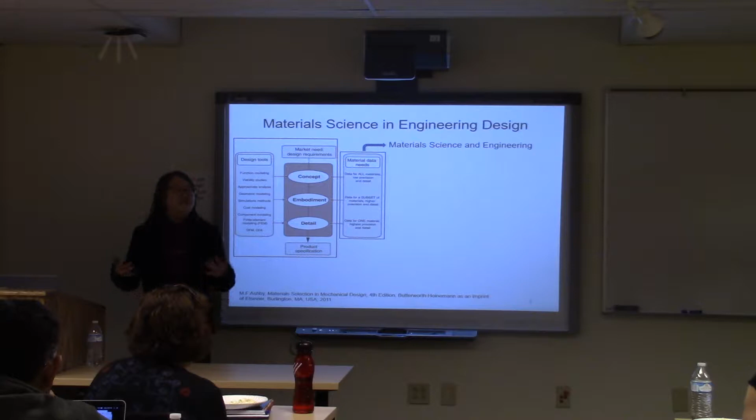So which actually puts the material science engineering integrated to the design process. Because you need to understand the whole world of the materials before you can choose the right materials for your product and the right appropriate process to make your product here. And to me, the core of material science engineering is this triangle map here, where we investigate the processing, structure, and property correlationship here.

And when I'm talking about structure, I'm talking about multiple scales. It's not just like from very micro scale, we're looking at grains, even from the atomic scale, arrangement of the atoms, point defects. I also see this as a structure. And all this will affect your properties.

So have the data, you understand this database doing this. Eventually, I hope we can do a reverse design. So you know what the desired property you need. And then, based on the knowledge you learned from material science, you know what's the target structure. And then go back to the processing you need to choose to make this product. And nowadays, it's also very important to integrate computational material engineering here to help you understand what's happening during the processing. Instead of doing tons of experiments, you can simulate first.

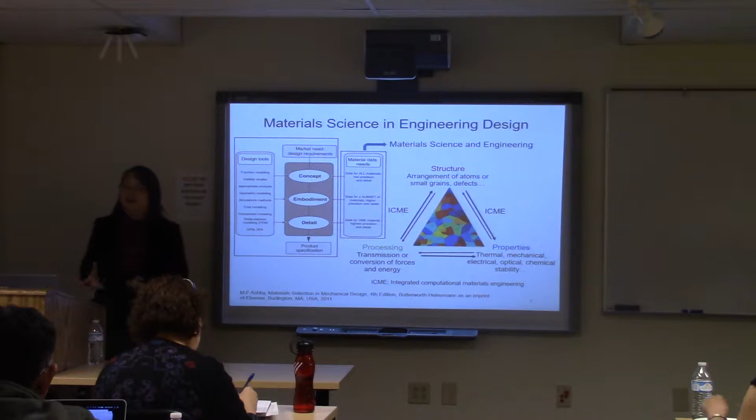And here's what I'm going to cover today. It will be a very broad topic, including my previous research and some representative computational work I have been doing, and the current research I have been involved in, and future research. And then in the end, I'm also talking about my teaching experience and interest.

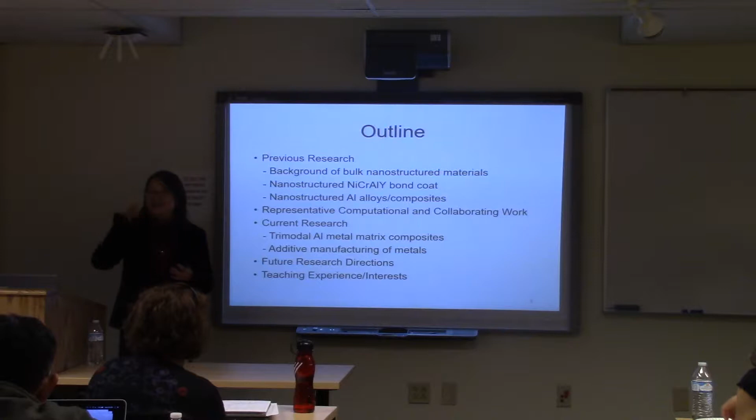So don't be surprised if I skip some slides there because the time doesn't allow me to go very in depth for each result. But I want you to get a sense about what I have been doing to investigate that triangle correlationship here.

So first, since the 1990s, the idea of nanostructuring has been growing in the world of science and technology. And some people talk about nano when they talk about nanoparticles. But what my research has been focused on is bulk nanostructured materials. So from the outside, you still see a solid part.

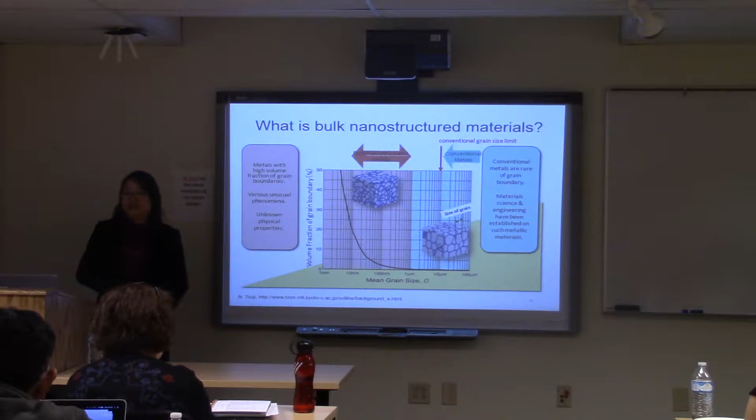But if you look into the internal microstructures, especially for metals, the traditional materials give you kind of a limit of the grain size, about 10 microns. But now people are trying to modify the internal structures to bring in higher volume fraction of the grain boundaries. And those grain boundaries can give you some unique physical properties which cannot be achieved in traditional materials. So I just take the mechanical property as an example here. This is the very early work, foundation about the nanostructure of pure copper.

True stress and strain curves. The lower part curve is for traditional material which have a grain size in terms of 50 microns. But once you reduce the grain size into 25 nanometers, now you have a dramatic increase in the strength here. So you see the benefits we can get when doing nanostructuring.

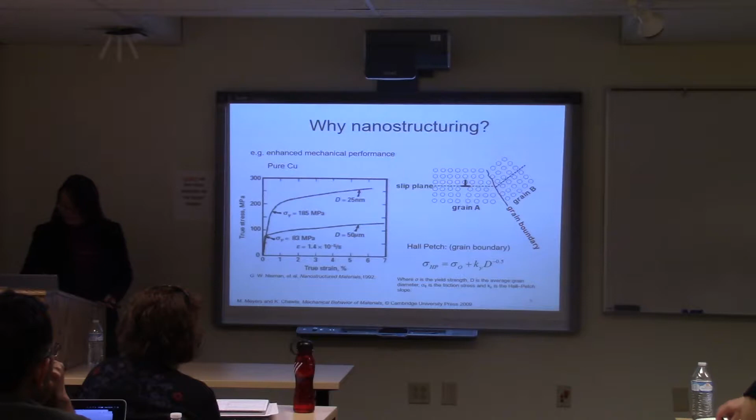There has been a well established mechanism here, where the grain boundaries can help to stop the motion of the dislocations, so you need to apply higher stress to really deform the materials. And it's governed by a Hall-Petch relationship here, where the strength is reversely proportional to the grain size. But in reality, most engineered materials are not pure metals.

They are more complex. They can contain multiple components. So what I have been thinking is how can we extend or use the benefits we got in nanostructure and apply them to real engineering materials. So I selected two very complex alloys from my previous research as an example to give you an idea

how nanostructuring can change their microstructure and their properties. So first we already talked about the question of what and why. Now we need to figure out how we can make those bulk nanostructured materials, right? There are a very wide range of processing techniques to create nanostructure.

One technique is called severe plastic deformation. You can directly deform the bulk material, or you can start with powder, using powder metallurgy. So the technique I have been using is called cryogenic ball milling.

This schematic is showing one apparatus. This is a real apparatus, and here telling you during the milling, the powder will be milled inside a slurry made of milling balls and liquid cryogenic media, for example liquid nitrogen. And then the impeller will be rotating at a very high speed, so we take advantage of the collision between the balls, the impact, to deform the particles.

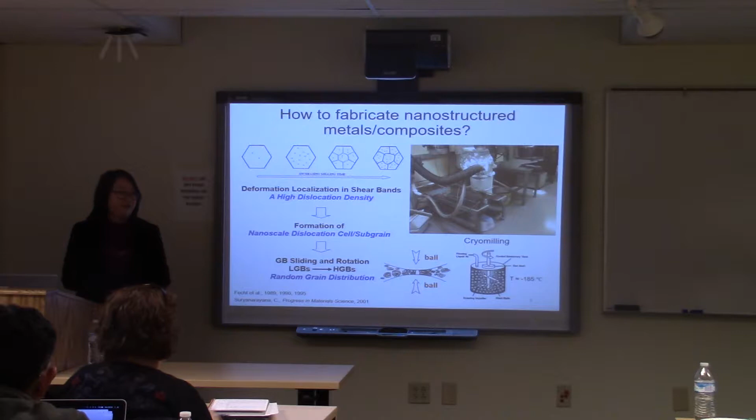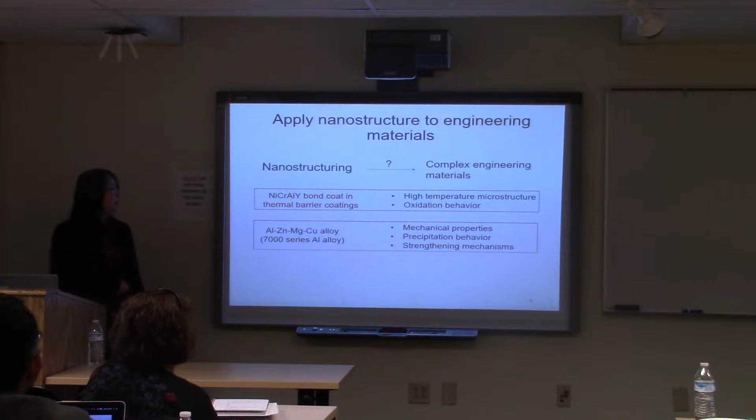So these two unique features of cryomilling give an idea that we can apply this method to complex engineering materials also, because we can start with the powder. So now I'm going to move into detail about the NiCrAlY bond coat in thermal barrier coatings.

Thermal barrier coatings are very commonly used to protect gas turbine blades from a very harsh environment, with very long thermal exposure at high temperature, usually about 1000 degrees C.

So people apply these multi-layer thermal barrier coatings, which include a ceramic layer here, which provides thermal insulation, and a metallic bond coat in between to provide adherence between the substrate and the top coat, and reduce the thermal expansion mismatch.

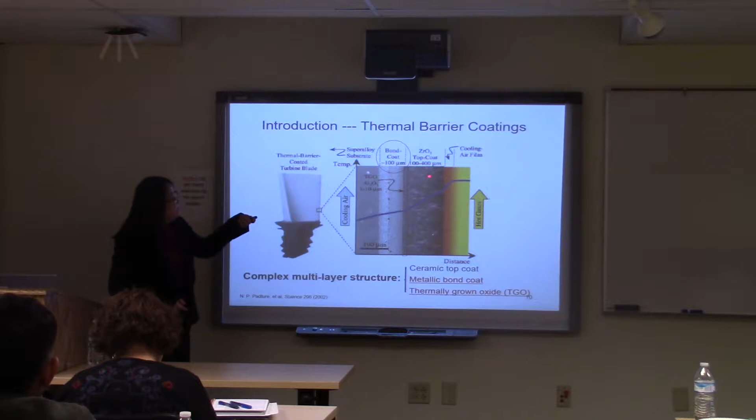And in between here, we also find an oxide layer forming between the top coat and the bond coat. So it's very important to be aware that this oxide is not like a layer we put in on purpose at the beginning. It's a reaction product during the operation of the thermal barrier coatings, due to the diffusion of aluminum to this interface and then the oxygen penetration to this.

Ideally, we hope this oxide layer will be pure alumina, since alumina is a self-oxidation terminating material. Once you have a thin, homogeneous layer, it can prevent further oxidation into the substrate. We also wanted to grow it homogeneously to reduce the stress created during formation of this oxide layer. This oxidation behavior is controlled by the bond coat.

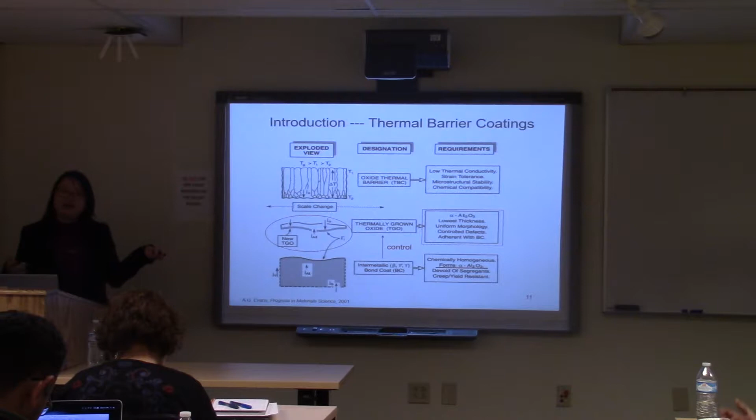Because your aluminum comes from the bond coat, I'm interested to see what nanostructuring of this metallic bond coat can change about the oxidation behavior.

That was back in 2006, when I came to the US to pursue my PhD. So that became the focus of my PhD: to figure out what's the mechanism underneath here.

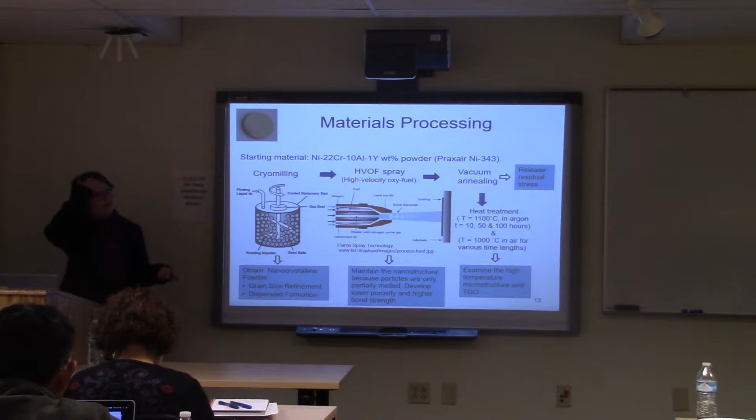So I first needed to make a lot of materials using cryogenic ball milling, and then we use a technique called high velocity oxy-fuel spray to deposit those powders into coatings. Then we apply some post heat treatment to reduce the residual stress. This is an example of the coupons, including both the substrate and the coating on top.

To investigate the mechanism, I also made a lot of conventional materials using the identical processing without the cryomilling, using gas-atomized coarse grain powders as the feedstock.

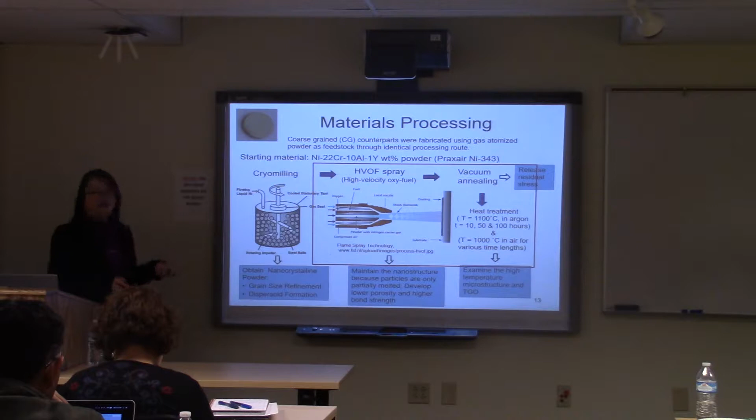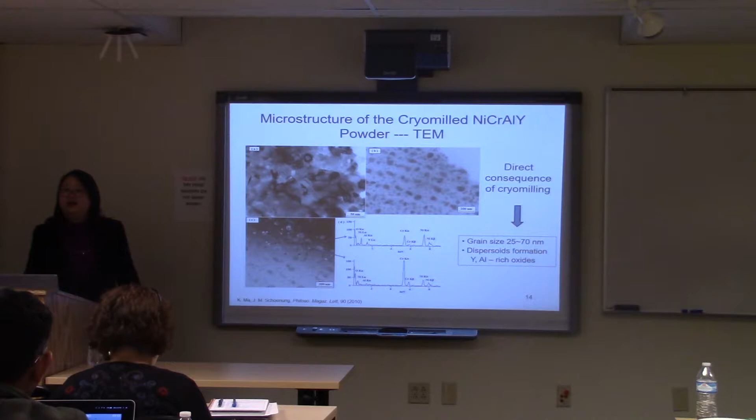First I looked at the powder we got, to see what grain size we got after cryomilling. This is a transmission electron microscopy graph of the powder, and we see the grain size is around 25 to 70 nanometers. We also used energy dispersive spectroscopy to identify the chemistry of some particles and found aluminum and yttrium-rich oxides and nitrides inside. This is very consistent with what we've found in other alloys made with cryomilling.

Using this nanostructured powder, we now want to see what the microstructure looks like when we spray them to make the bond coat. On the left is the conventional material made from gas-atomized powder, which has a coarser grain size of 2 microns or above. On the right is the cryomilled one, using nanostructured powder as the feedstock. You can already notice the distinction.

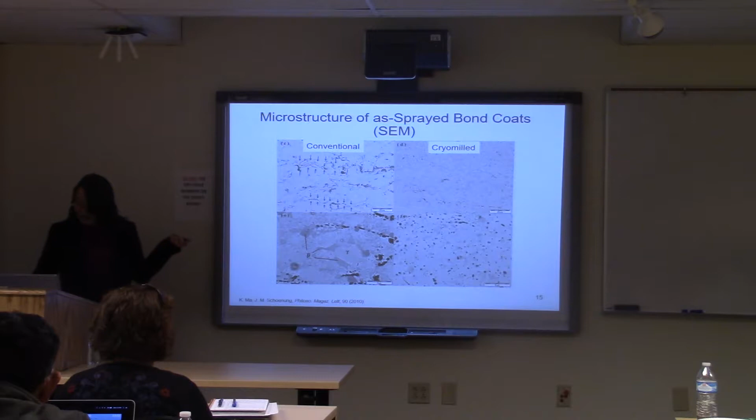You get continuous interpass oxidation between the high velocity oxy-fuel spraying passes, a well-established phenomenon people have reported about. However, in the cryomilled material, we don't see this anymore. We see very small dispersoids, below 300 nanometers, very well distributed throughout.

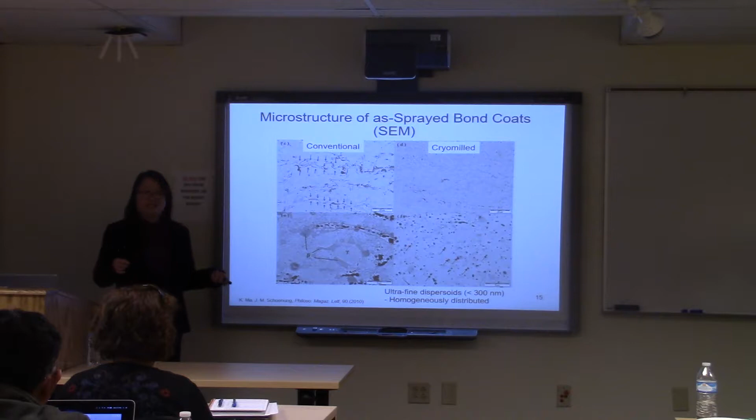If you recall the TEM results of the powder, I already showed those oxides and nitrides exist in the powder. By doing EDS mapping, we further identify the chemical composition, and we find, in addition to the aluminum-yttrium-rich oxide, aluminum-rich nitride in this system as well.

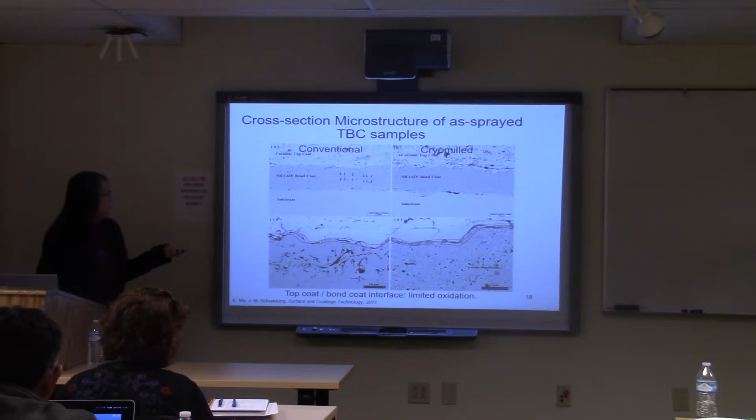Now if we start the heat treatment in air, like the real operational environment, I'm going to run through several SEM images quickly. When I do that, I'd like you to pay attention to this dark region, its thickness, and some arrows I point to, which give a different contrast.

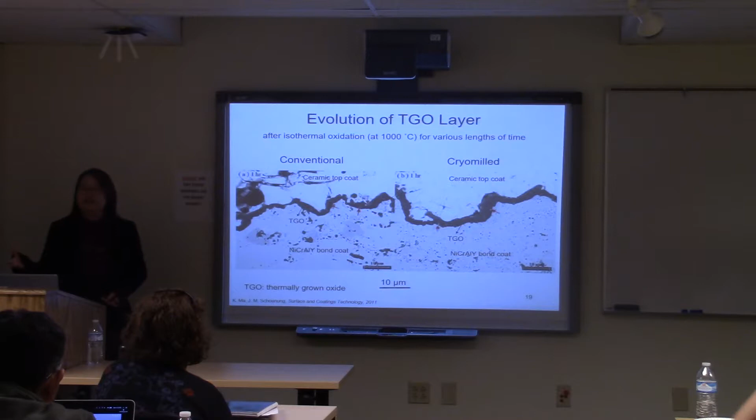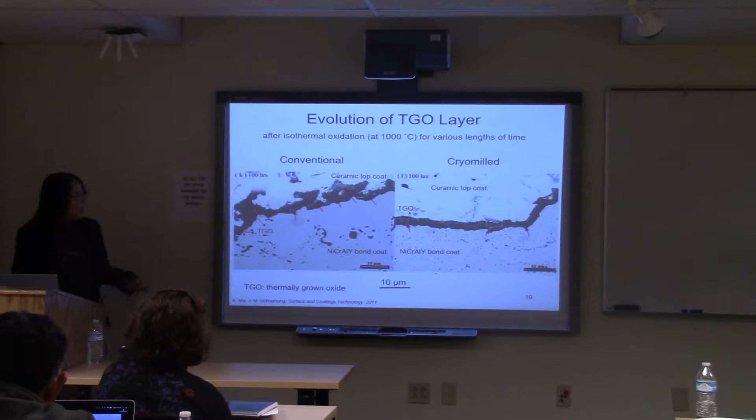That might be from the EDS, we identify that's a secondary oxide phase instead of the alumina. So this is 1 hour, and after 4 hours, 8 hours, 10 hours, 50 hours, and 100 hours. So this gives you an idea about the thickness or the qualitative distribution of this.

But I do quantify the oxidation behavior by really doing statistical measurements on the thickness of the TGO here. And the thing I didn't show here is the XRD and the EDS mapping, which help me to understand

what's the composition of the oxide layer. But coming back here, if we plot the thickness, the average thickness with error bars, which is the standard deviation, giving you the idea about how homogeneous the TGO layer is across the time here. And you will see the cryomilled coatings give you the TGO growth achieving steady state very quickly, ending up with a thinner oxide layer here.

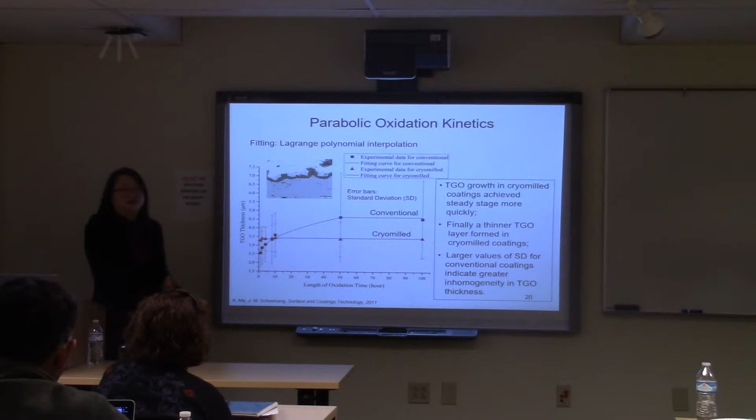And you also will see larger values, which is the red error bars here, for the standard deviation. For the cryomilled powder, it's smaller, so that means you get more homogeneous growth in terms of thickness.

And then I look closer at the very starting point, kind of a zoom in of the previous figure, the very first 10 hours. So even though the cryomilled coating starts with a thicker TGO layer, I think that's due to introducing a lot of grain boundaries, which provide a faster diffusion path at the beginning, giving you this. But as time goes by, it's actually very stable, which gives you the longer thermocycling lifetime for this.

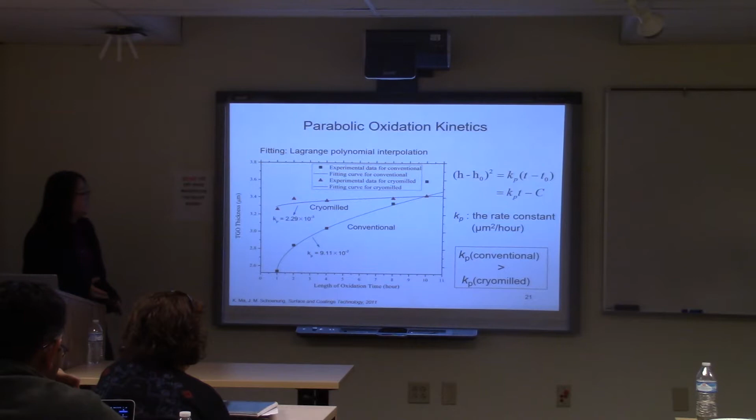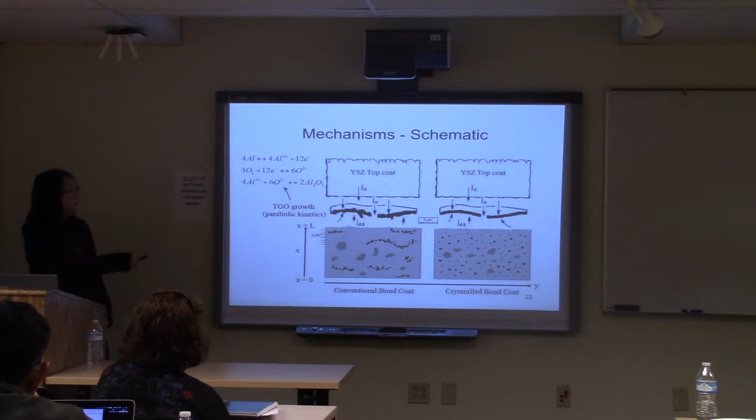So then I wanted to really develop mechanisms for how the microstructure gives you the final growth of the oxide layer here. Kind of schematically showing you the key features between the conventional bond coat and the nanostructured bond coat. And because those dispersoids are rich in aluminum, which is the key element for you to form the oxide, I modeled this by setting up boundary conditions and solving the diffusion equations.

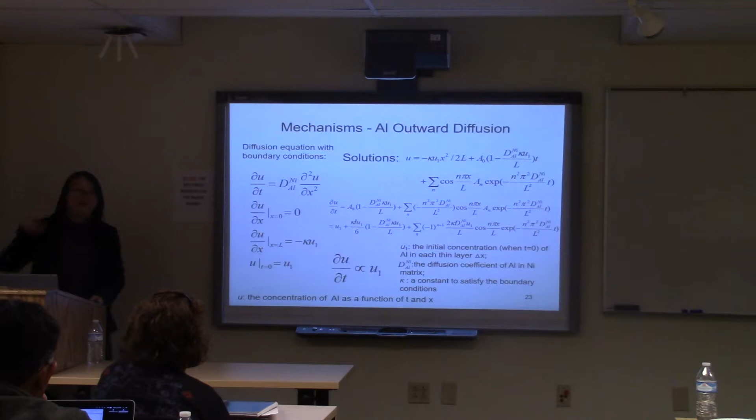I'm not going to go into detail about the mathematics, but we came out with a solution, finding that the diffusion rate of aluminum is proportional to the initial aluminum concentration, where I can divide the bond coat into very thin thicknesses to analyze this.

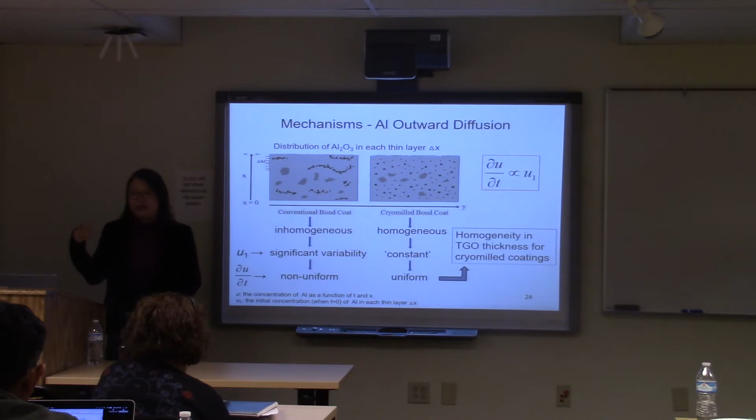So the mechanism that comes out: the aluminum outward diffusion is controlled by the homogeneous distribution of those aluminum-rich oxides, giving you a more constant aluminum concentration profile at each divided thickness here. And finally this gives you the uniform and homogeneous TGO thickness of the cryomilled coatings. And also, because of the more homogeneous rate of aluminum diffusion, you can avoid all those spinel, the secondary phase oxides here.

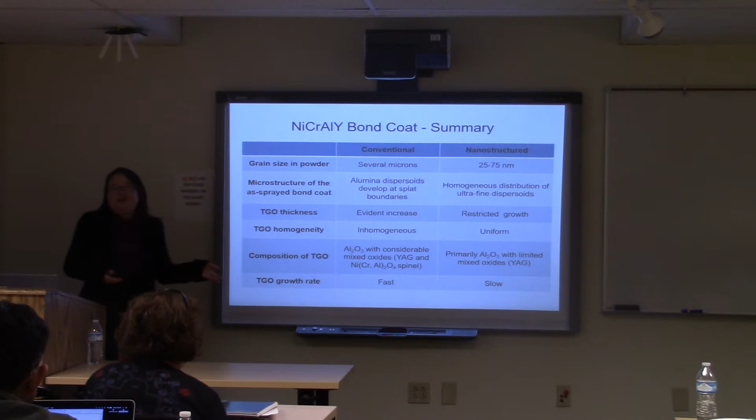It's kind of a recap about what I have been showing, and my real PhD work is more than this, because I've been skipping a lot of microscopy and other characterization work here. But I just want to give you an idea about how my research is involved in that triangle.

We got improved properties, which is good, but we don't end up there, right? We need to know why this happens. Can we reproduce the same thing, or can we use the knowledge we learned from here in other material systems?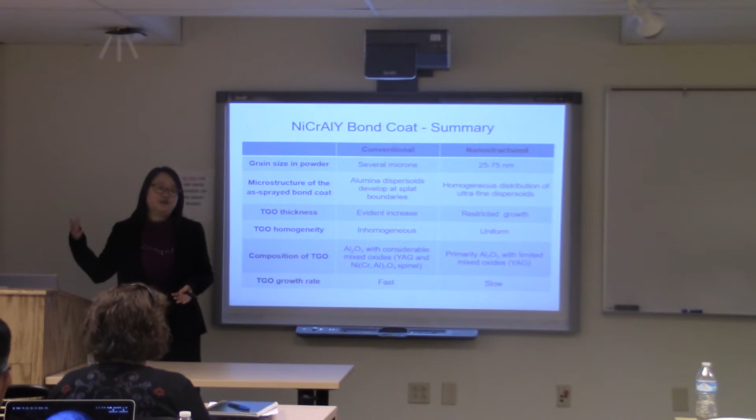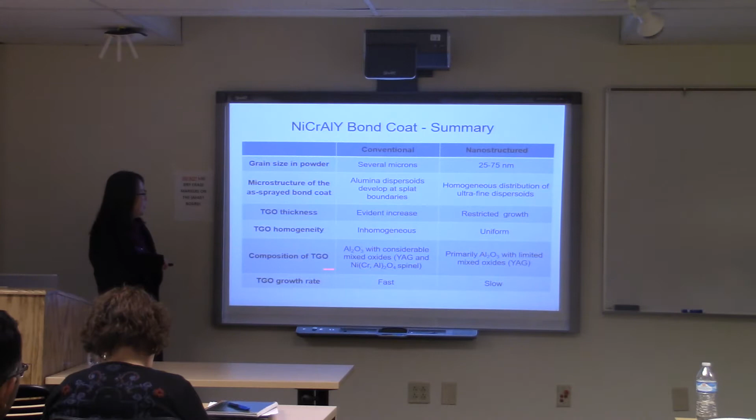So it's kind of learning the microstructure of these two different coatings, and really studying the composition of the oxide and how the microstructure of the bond coat contributes to this. So that's kind of a wrap up of my PhD work here.

And then I continued to work on aluminum 7000 series alloys, which are usually used as structural material for aircraft or transportation. It's a project funded by Boeing. They want to really make light and strong materials, so they wanted to extend the idea of nanostructuring to this complex engineering material.

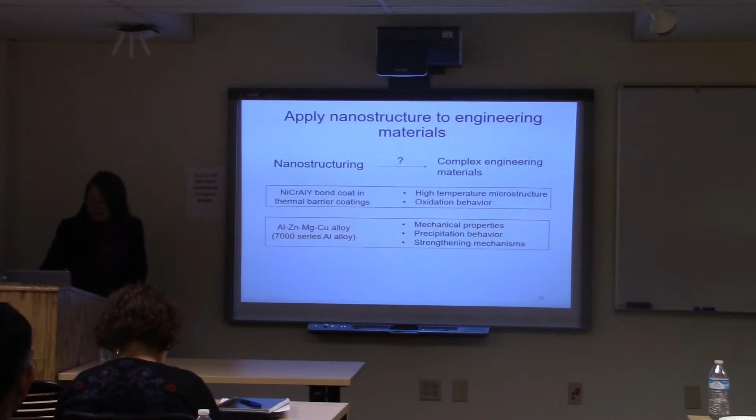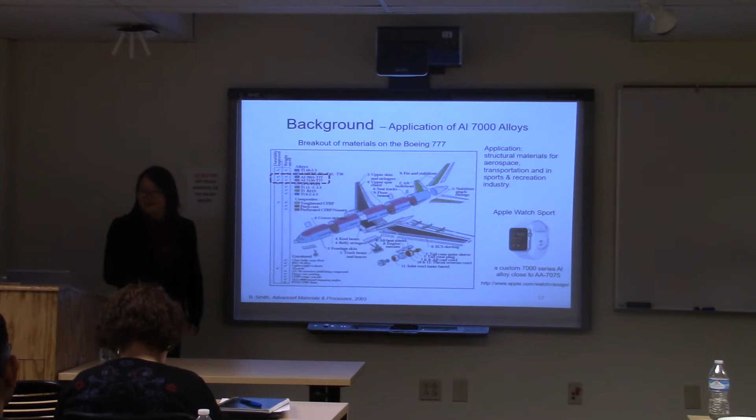This is background about the application here. I'm showing you a breakout of a Boeing 777 aircraft, showing how much the pink and dark gray areas, how much of the airplane is made of this series of alloys. And interestingly, recently Apple Watch also started to use this series of aluminum as the framework for the watch. You might wonder why this special class of alloy attracts so much interest here.

So this is what we call an Ashby plot. I generated it using the CES software, which I used for teaching.

Because we want light and strong, right? So the y-axis is the specific strength, that's your yield strength divided by the density.

And the environmental issue is a global issue now, people care about green engineering. So the x-axis is the embodied energy, kind of how much energy you need to consume to produce 1 kilogram of these alloys from traditional methods. So we want the desired material to be towards this end.

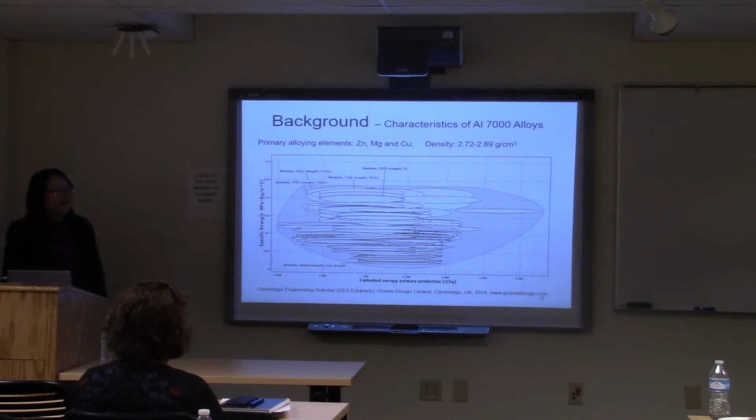And guess what we find? All the aluminum 7000 series. Again, those smaller bubbles point to those specific classes of alloys, while this big bubble represents the whole aluminum alloys. I used this software to generate a broader materials world, which also includes ceramics, but that makes it too messy to really identify where this is.

So now you might wonder why these alloys can give you the highest specific strength. It's a very special class of alloy, which we usually call heat treatable alloys. Upon heat treatment, the hardness of this alloy can increase until it achieves a peak hardness. If you continue to treat it, you get softening. In industry, they usually call this condition the T6 temper, where you get the highest hardness.

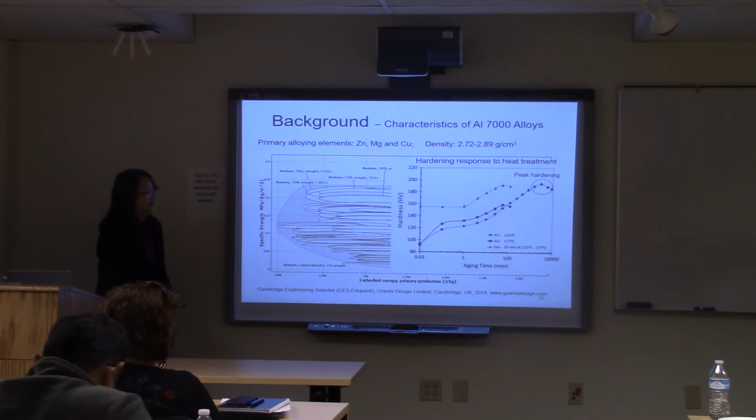So what contributes to this special hardening response to heat treatment? It's time again to look at the microstructure inside this alloy. Reminding you, this alloy contains magnesium, zinc, and copper. Those elements are not 100% in solid solution in aluminum alloys. So you usually heat the material at a high temperature and then quench it down at a very fast cooling rate. If you look at the phase diagram, that's the method where you can put more solid solutes in the matrix than the equilibrium state.

If you continue to heat treat past the peak, in industry they call it the over-aged temper, sometimes using T7 to identify that. You will see the eta prime phase transform to coarser, rod-like eta phase, which is still useful because there's a trade-off between properties. Now you sacrifice your strength a little bit, but those equilibrium eta phase will give you higher stress corrosion resistance.

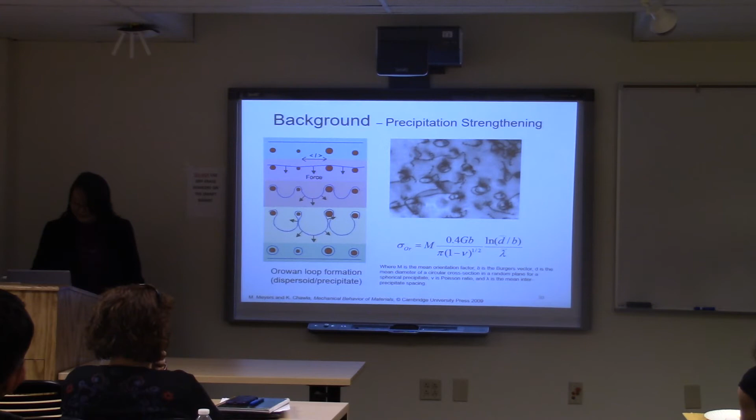So now it's time to combine nanostructuring and precipitation strengthening. Nanostructured material actually has a wider definition now - sometimes people even call the commercial 7075 material a nanostructured material because it has those nano-sized precipitates. But what I'm going to talk about now is combining grain boundaries with those precipitates to see what we can get from there.

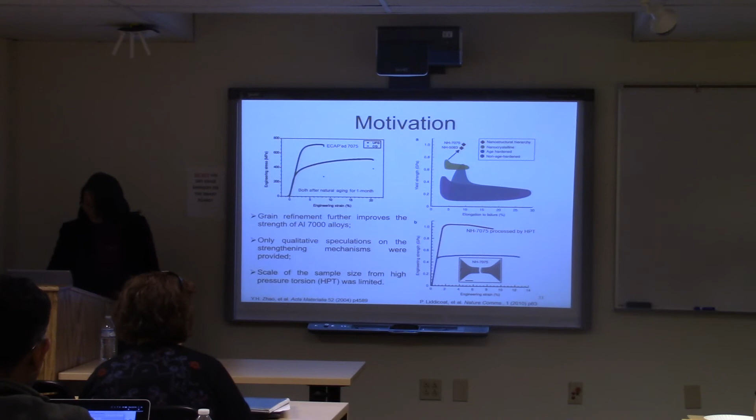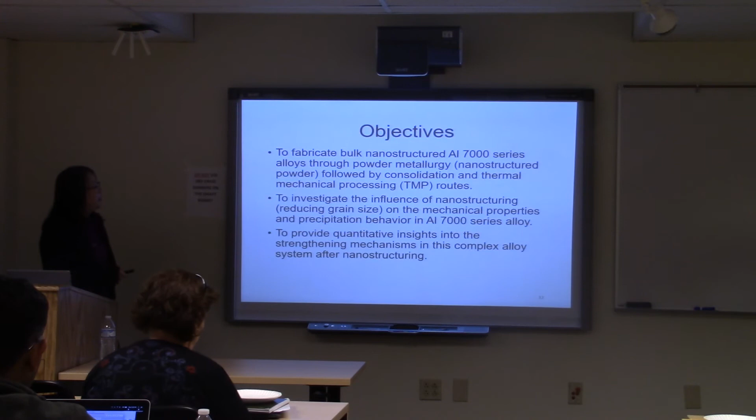So we really want to extend the benefits to real material that can scale up, and that's where my research contributed to further this area. So having all those backgrounds set up, and what has been already learned for this system, the objective for my research is to fabricate bulk nanostructure materials through powder metallurgy, followed by consolidation, which gives you the capability to scale up.

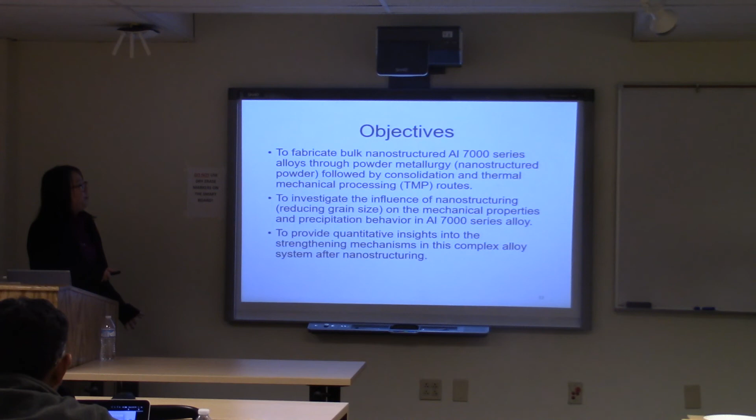I'm also really interested to investigate the mechanism here. What's going on? Are we going to add up two strengthening mechanisms directly to get the final strength? If you get value A from grain boundary strengthening and value B from another mechanism, will the final strength be A plus B? You'll see that in the following. To do that, I need to provide more quantitative insights of the strengthening mechanism here.

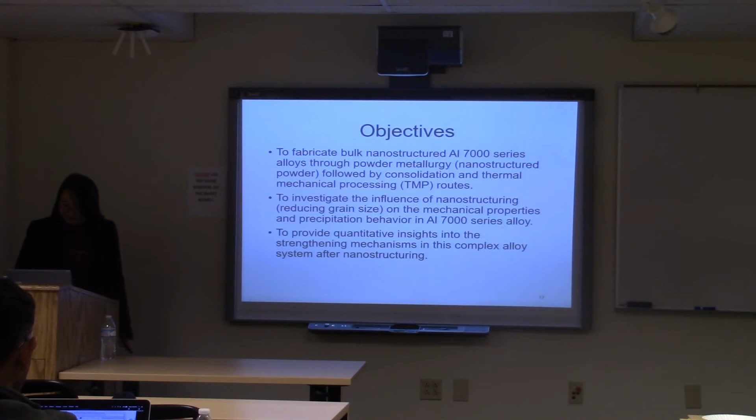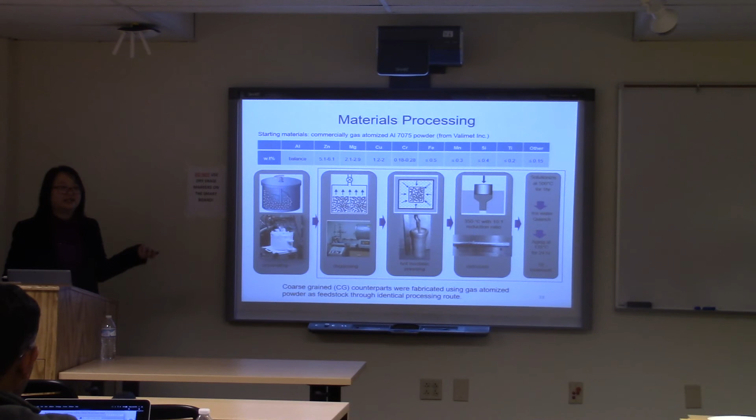This is just material processing. I'm not going to talk in details, it's just followed with consolidation and secondary thermomechanical processing. But for each material, I made a coarse grain counterpart using identical processing without the cryogenic step.

So this is what we get in terms of mechanical behavior. On the left, what I call coarse grained is still on the order of 2 or 3 microns because we're still using powder metallurgy. On the right-hand side, I call it ultra-fine grain because after the thermal exposure during consolidation and the secondary thermomechanical process, you get a little bit of grain growth. So now we're not talking about grains on the order of 20 or 30 nanometers, we're talking about a couple hundred nanometers, like 100 to 200 nanometers.

First, the highest strength we can get is like 734 megapascals, compared to Curve 5, which is a commercial 7075 material. This is where I just buy a material from the market and then test it.

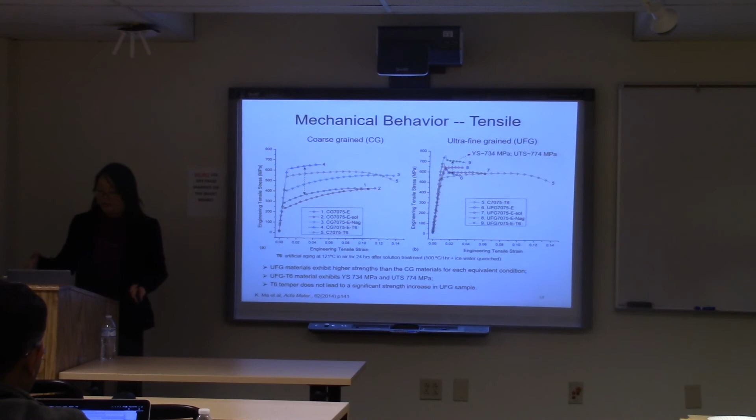More interestingly, I also find the T6 temper increase from Curve 1 to 4 is much larger than what we can get from the ultrafine grain material. We still get some strength increment from the precipitation behavior after T6, but it's not as large as I want it to be. So now, again, it's time to understand what's going on here, why I didn't get as much strengthening in terms of precipitation as I see in the traditional material.

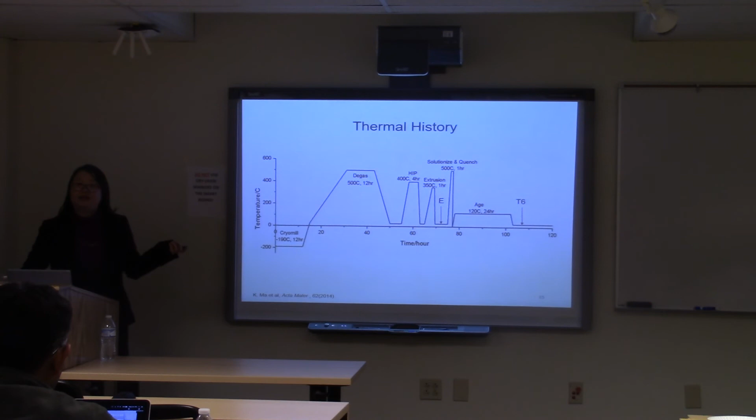So that's where I first look at the microstructure in the extruded condition and then after T6. Just to remind you, T6 is the processing that brings you precipitation strengthening. I'm going to skip a couple of TEM images, but I want you to get a sense that there's really a lot of work to get those TEM samples. What we focus on is looking at the grain size, the precipitates, and the dislocations. Each slide corresponds to different materials in different conditions.

Because we have such a high volume of grain boundaries, which is a very good sink for vacancies and dislocations during the thermomechanical processing, they decrease the nucleation sites for the precipitates and hinder homogeneous nucleation inside the grain.

That's why in the microstructure, which I skipped, we do see very limited heterogeneous nucleation of precipitates at dislocations in that material. And because of the grain boundaries, we have segregation of magnesium and zinc to those grain boundaries, so we find some coarser magnesium and zinc intermetallics there.

After T6, although we still see precipitates, the thermal exposure now anneals the dislocations more easily because of those high volume of grain boundaries. Compared to the traditional material, we get not much heterogeneous nucleation sites for the precipitates, and that's why we see from TEM only a very limited number density of precipitates.